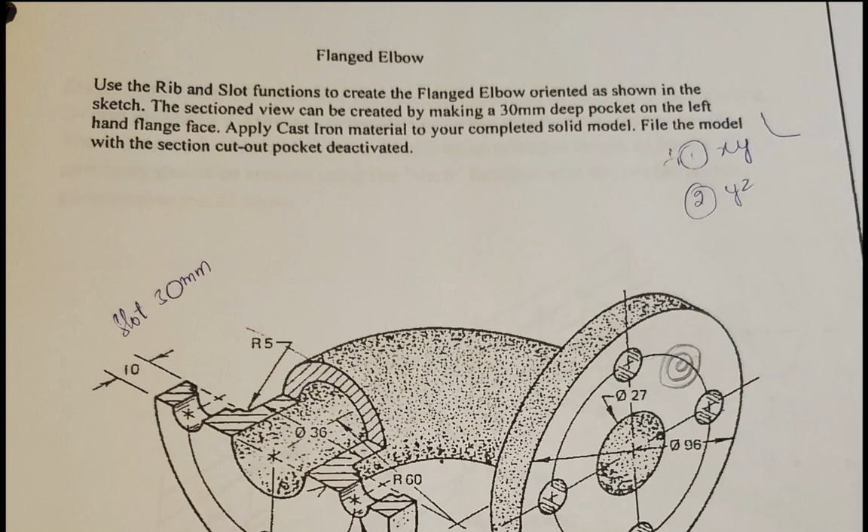Welcome to this Fusion 360 tutorial on Flanged Elbow.

In this tutorial, you will learn how to use the pipe command to extrude and make holes, how to use circular pattern, constructing a plane along path, and the mirror command. So let us begin.

As our CAD drawing is in metric, go to document settings on the left side pane, click on change active unit, and change our unit type to millimeters.

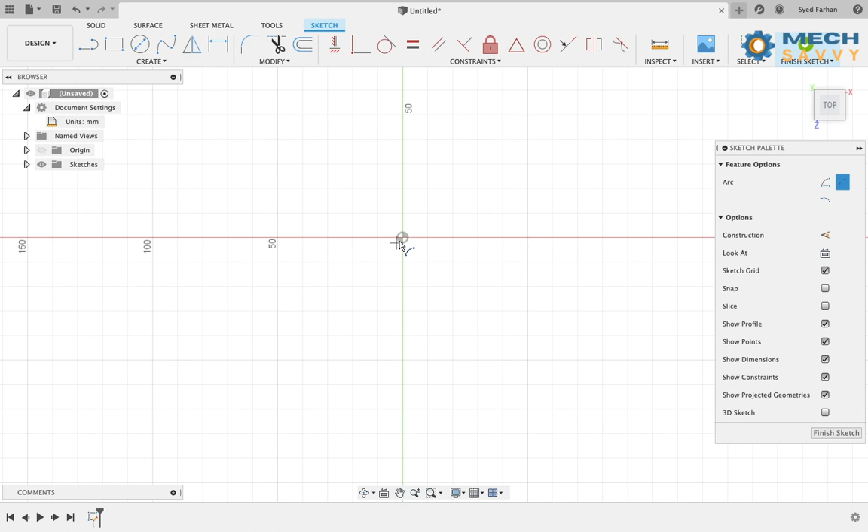Next, go to sketch, click on the create drop-down menu and select arc, 3-point arc, and select our origin as the first edge and second point on the right side of the plane. Give the radius as 60.

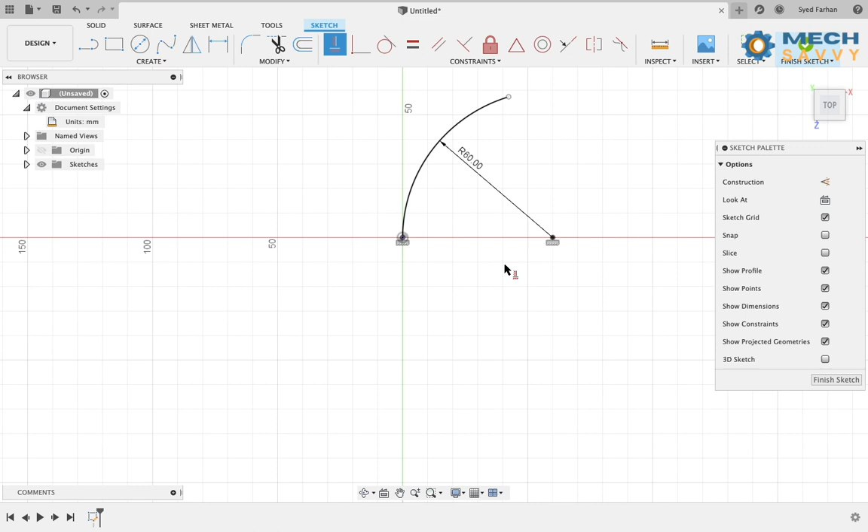As our center point is hanging, that is not defined, to make it in the same line with the origin, select horizontal from the constraint menu and select both points. Similarly, select center and second point to align them vertically.

Our sketch now has all black lines. Click on Finish Sketch. Go to Create, select Pipe,

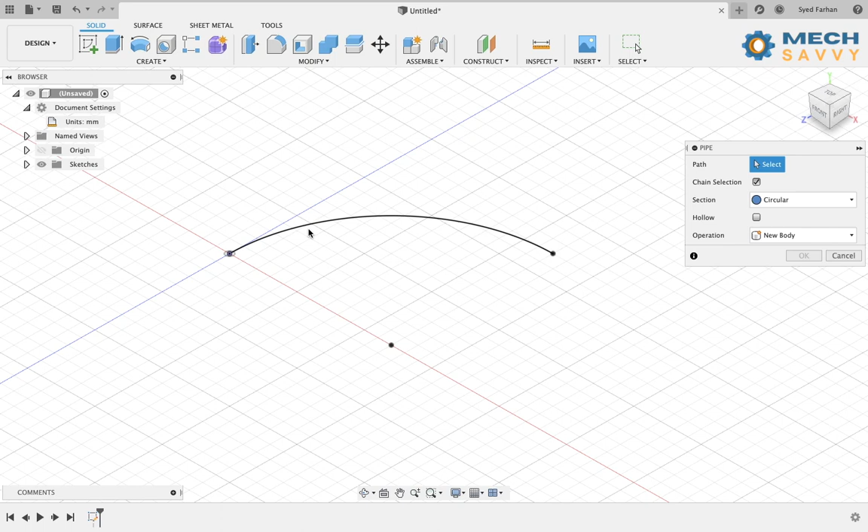select Path as our arc, and give the diameter in section size, that is 36.

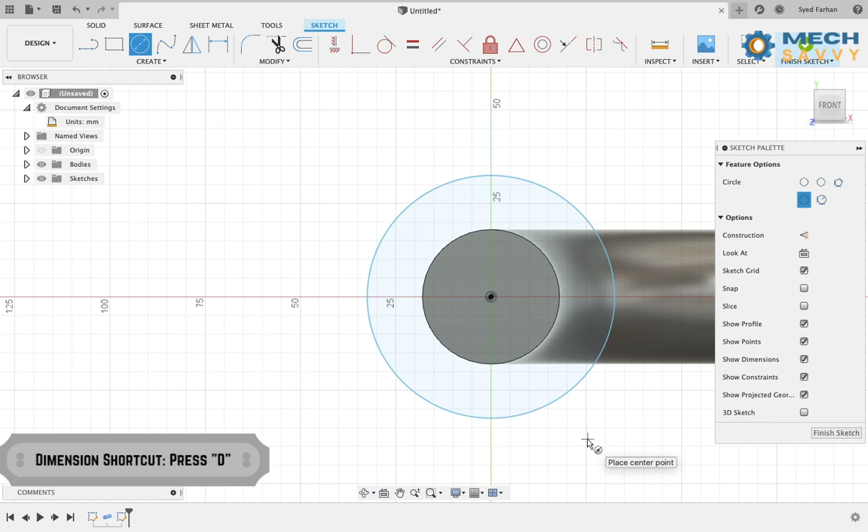Now select Create Sketch on end face. Hit C button to draw a circle from origin and press D to give dimensions. Give 96 as our diameter.

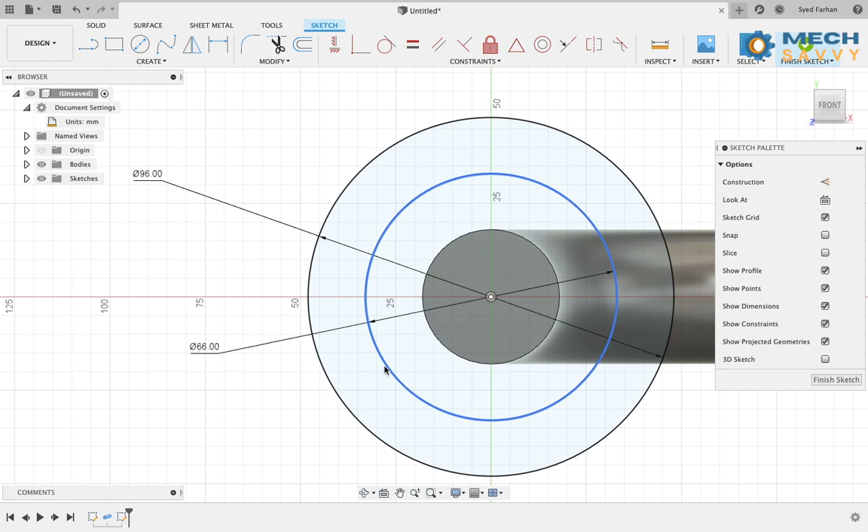Again press C and D to draw the inner circle of diameter 66. Hit escape to exit the active command and select the inner circle. Press X to make it construction.

Draw a horizontal construction line from the origin to the inner circle. Hit X to make it construction. Again draw a circle of diameter 27, which will be the center hole of our flange.

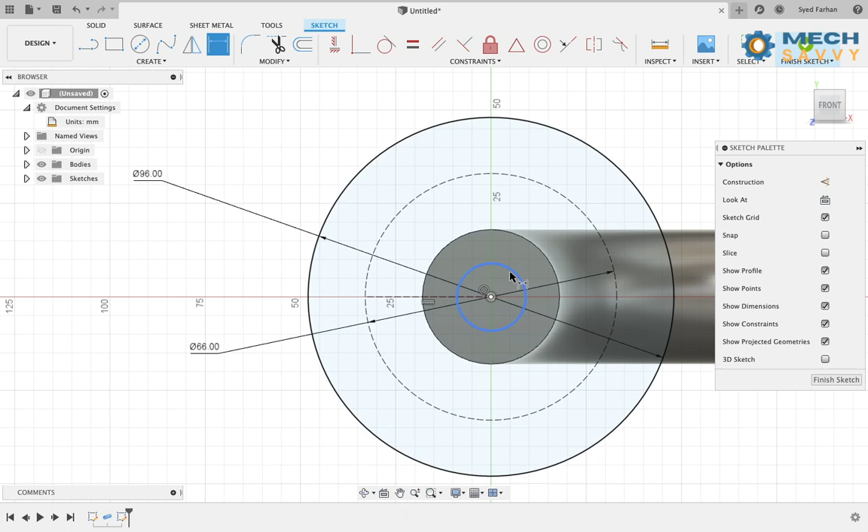Click on Finish Sketch. Click on Extrude. Select the circle, except the inner hole, and give the distance as 10 mm.

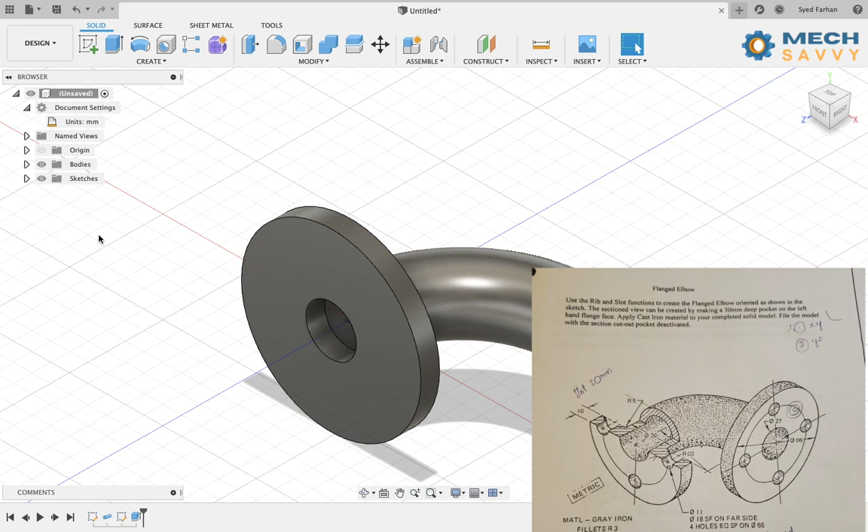Go to the left browser pane in the Sketch drop-down menu. Turn on the visibility of the sketch too.

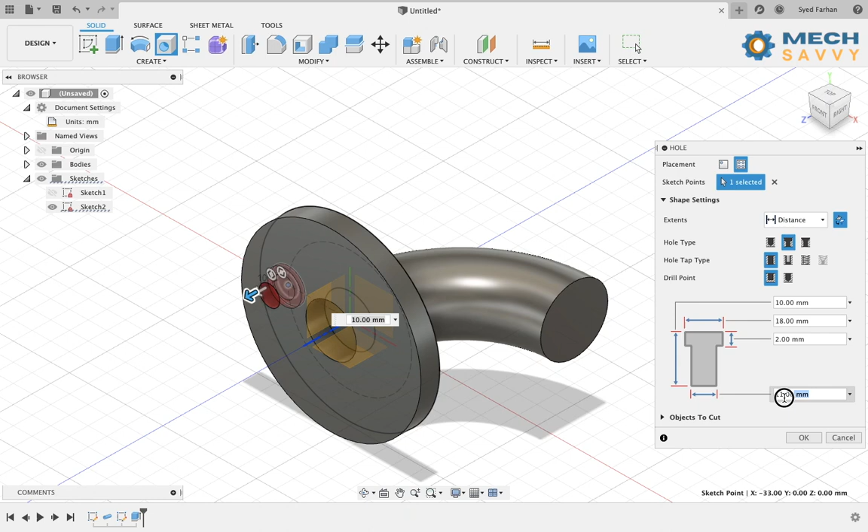Now we will create multiple operations using the same sketch. Select the endpoint of the line, make a hole, type as counter bore, give 18 mm and 11 mm respectively, and depth as 2 mm, and click OK.

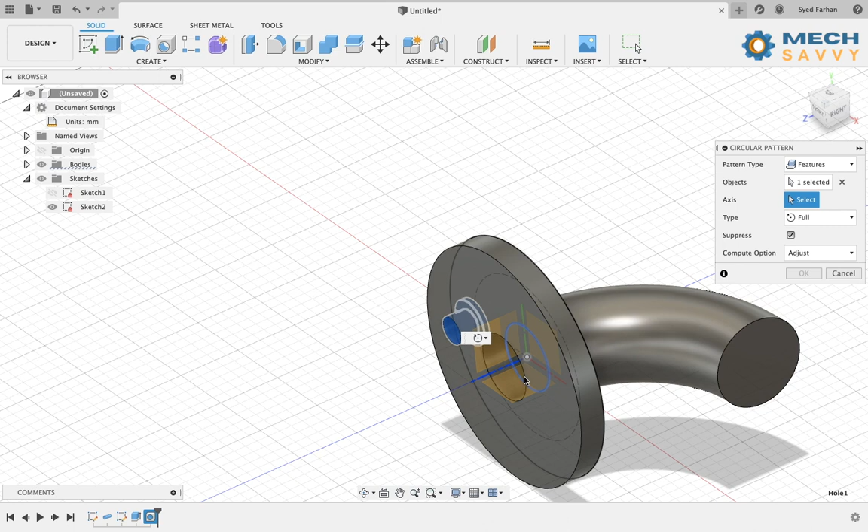Go to the Create menu to create the circular pattern. Make the pattern type as feature. Select our hole as object and axis as center circle, and give the quantity as 4.

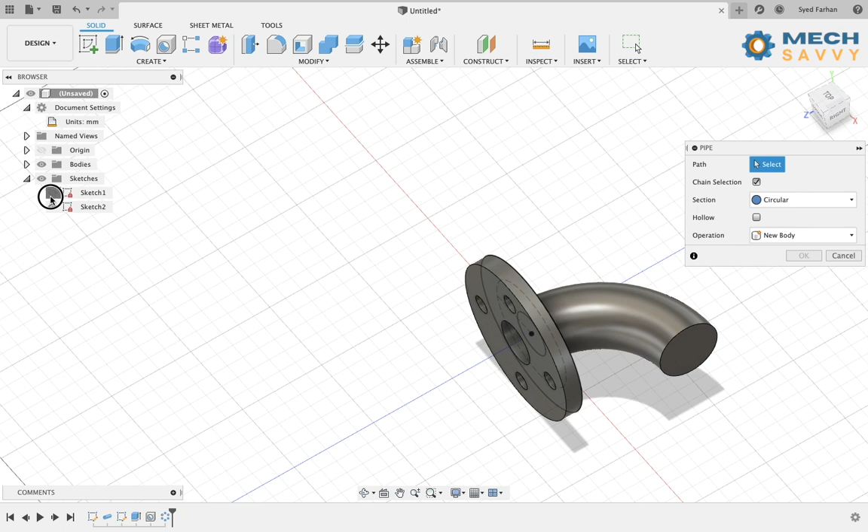Next, we will create a center hole in the pipe. Again, go to the Pipe command from the Create menu. Turn on the visibility of sketch 1 and select Arc as our path.

Give 27 as section size with cut operation. Now our center hole is created.

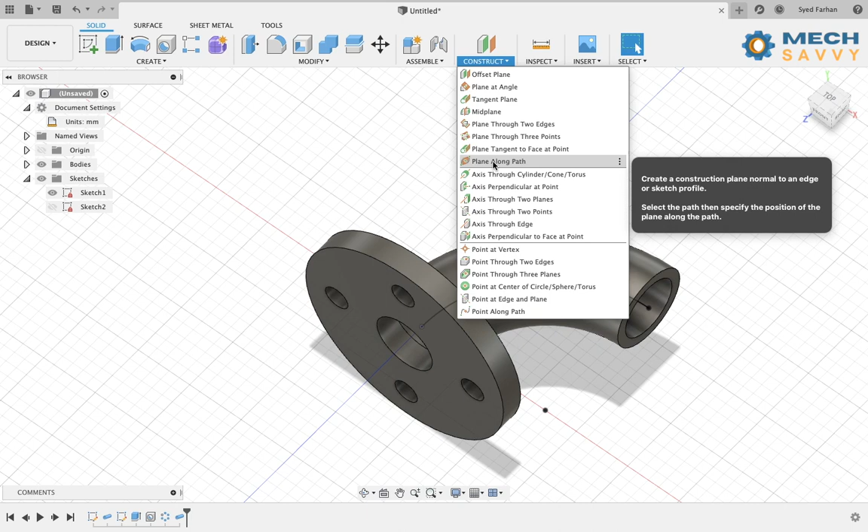Next, we are going to mirror the flange on the other side. So go to the Construct menu, select Plane along path. Select the arc from sketch 1 and drag the plane to the midpoint in the center and click OK.

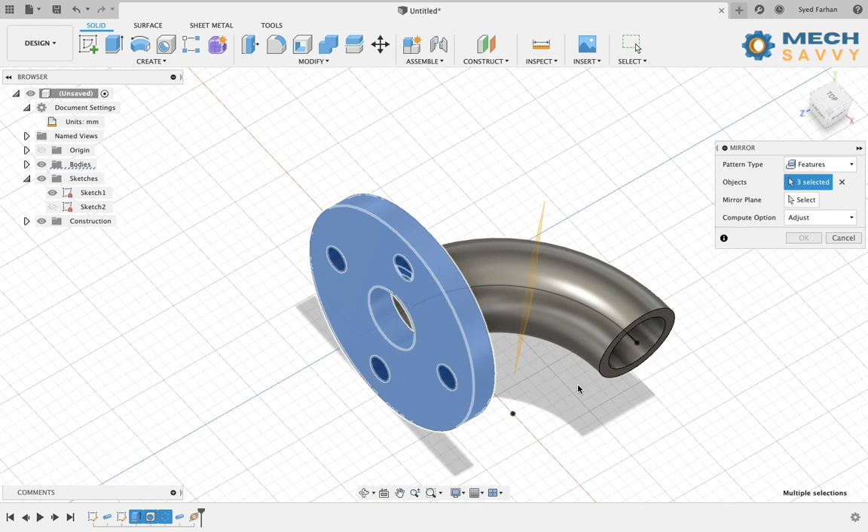Go to the Mirror command from the Create menu. Select Pattern Type as Feature, and select Flange with Holes. Select our mirror plane that we created and click OK.

Lastly, give fillets as 5 mm and 3 mm respectively. With this, our flange is completed.